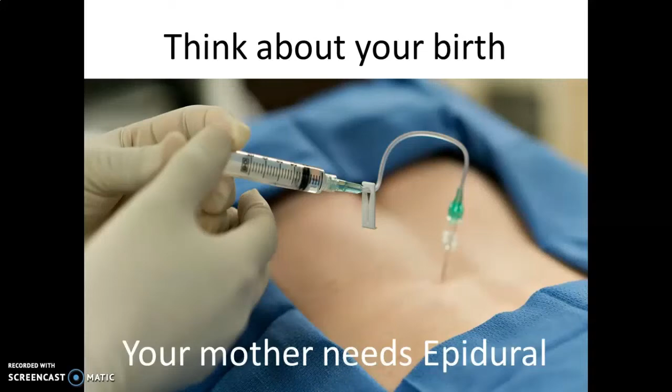Think about your birth — your mother needs epidural. Think about your death — your body needs formalin. From birth to death, you need many other things as well.

Early in the morning, you need toothpaste to brush your teeth. Then you need food and water to eat and drink. When you are ill, you need medicine.

Do you like to be naked? I am sure you are not. So you need clothes to cover your body. You need vehicles to go here and there, and those vehicles need fuel.

Can you live without electronic stuff such as smartphones, laptops, televisions, and printers? After a tiresome day, you need your home sweet home to sleep well.

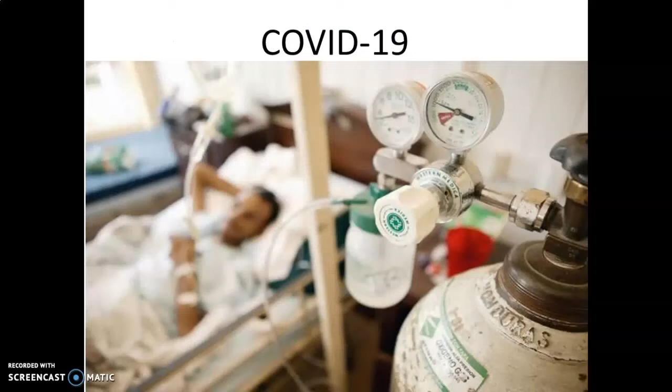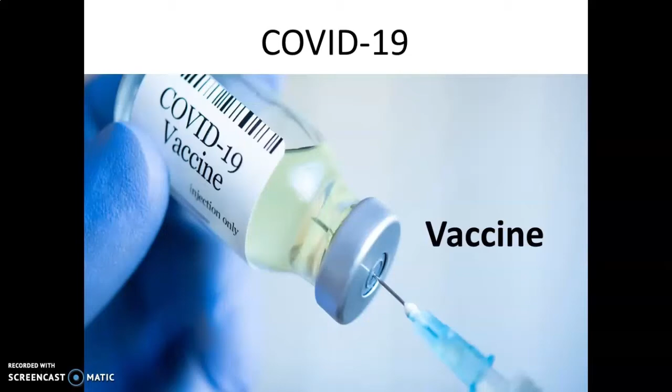Think about this COVID-19 pandemic situation. To defeat COVID-19, we all need vaccines. Did you think how all those things you need from birth to death are actually made? You may have taken them for granted, but all those were actually made with the help of chemical engineering.

So, what is this chemical and process engineering? Chemical and process engineering is the design and development of processes to produce, transform, transport and properly use materials and energy in environmentally, socially and economically effective ways by applying the knowledge of physical sciences, life sciences, mathematics and economics.

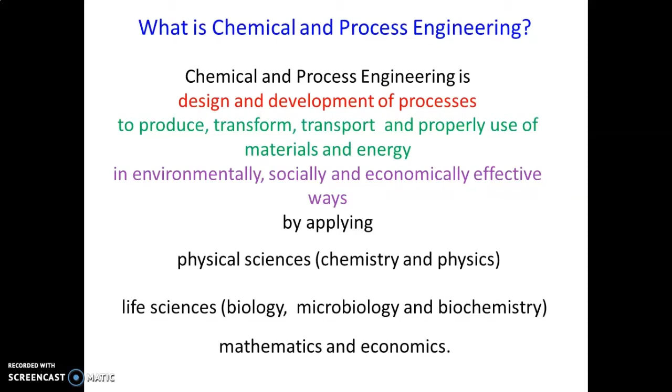Now let's see the difference between chemistry and chemical engineering. It's true that chemical engineers are comfortable with chemistry, but they do much more with this knowledge than just make chemicals. It's all about originality and scale.

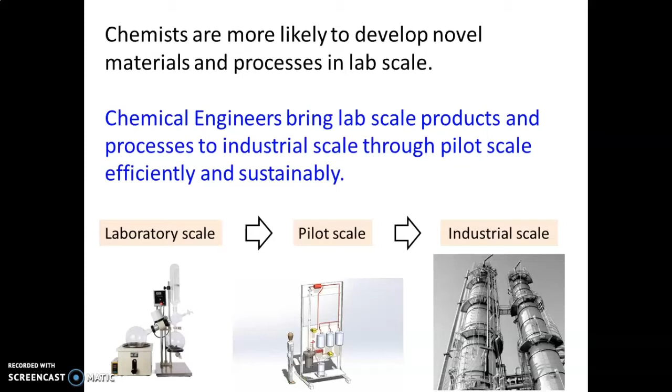Chemists are more likely to develop novel materials and processes in lab scale. Chemical engineers bring those lab-scale products and processes to industrial scale through pilot scale, efficiently and sustainably.

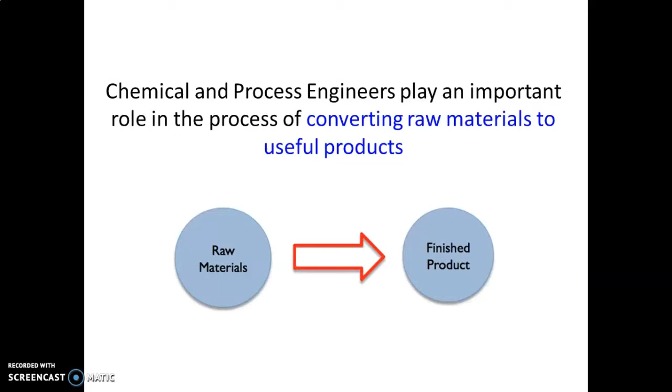Chemical and process engineers play an important role in the process of converting raw materials to useful products. When converting raw materials to useful products, different unit operations are used. Now, what are these unit operations?

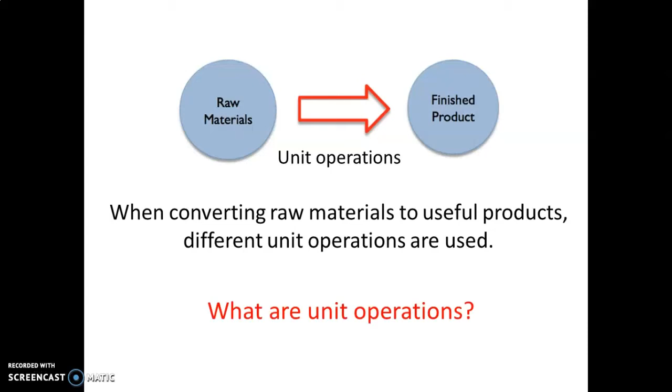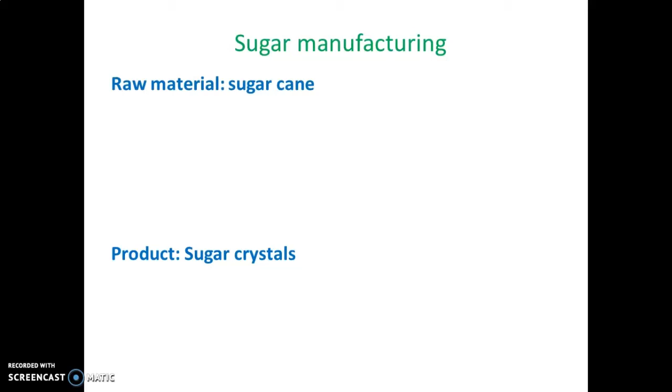Let's take the sugar manufacturing process as an example. Raw material is sugarcane, and we need to convert sugarcane to sugar crystals. First of all, we need to extract juice from sugarcane. Then the extracted juice is purified.

We call it clarification. Then we need to evaporate water from the clarified juice and concentrate the solution. Finally, we make sugar crystals from the concentrated solution — that is called crystallization.

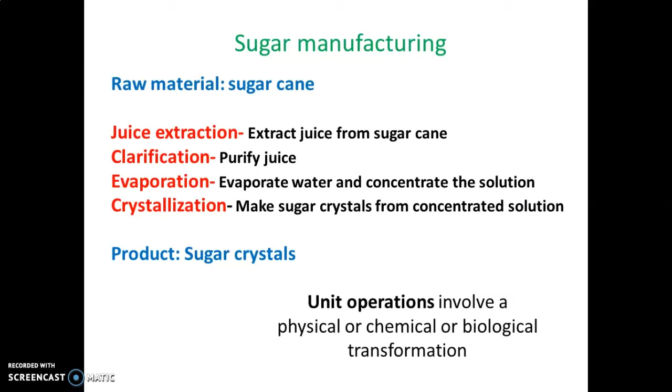These units — extraction, clarification, evaporation, and crystallization — are the major unit operations of the sugar manufacturing process. These unit operations involve a physical, chemical or biological transformation.

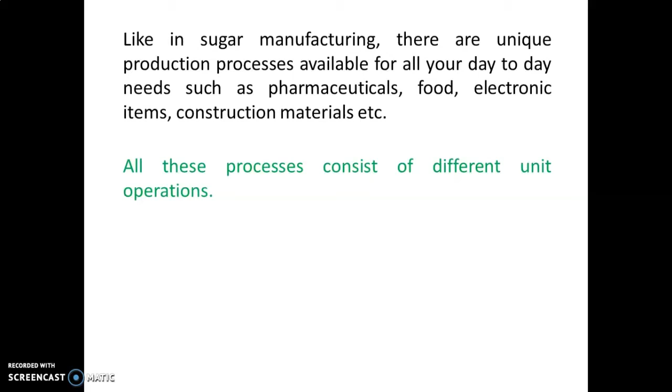Like in sugar manufacturing, there are unique production processes available for all your day-to-day needs such as pharmaceuticals, food, electronic items, construction materials, and so on. These processes consist of different unit operations. Planning and design, operation, control, and optimization of these unit operations are done by chemical engineers.

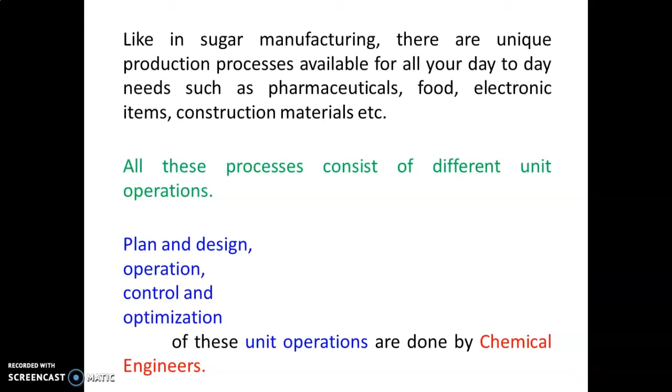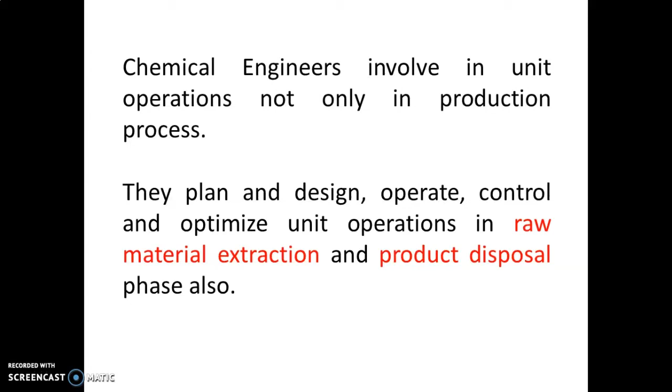Chemical engineers are involved in unit operations not only in the production process. They plan and design, operate, control and optimize unit operations in the raw material extraction and product disposal phases also.

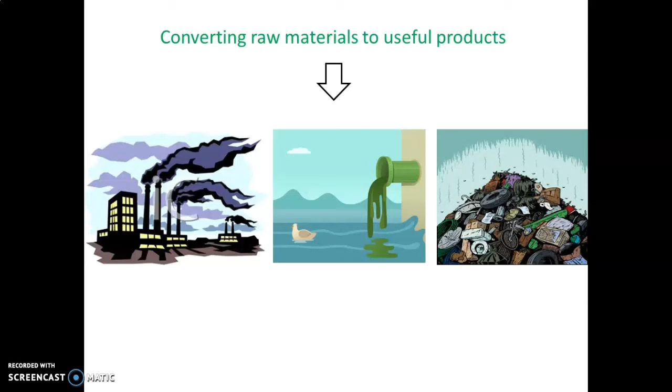We all know that converting raw materials to useful products generates many kinds of waste streams. Chemical engineers plan, design, operate, control and optimize the unit operations in order to minimize pollution as well. They always do this according to sustainable development concepts.

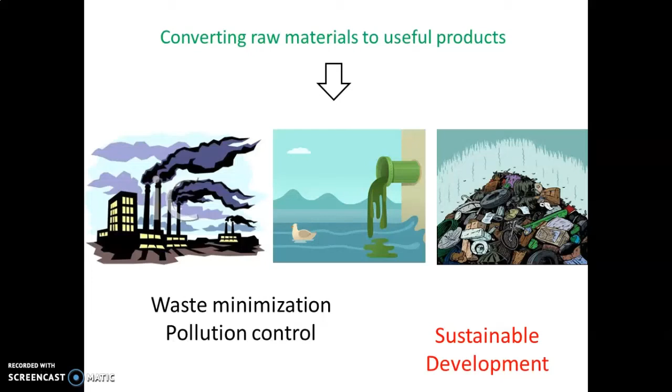Now, if I tell you in a concise way what chemical and process engineers do: they plan, design, operate, control and optimize unit operations and processes for the purpose of production, transformation and transportation of materials, and safe disposal or recycling of them after the use phase.

It is very clear that chemical engineers play an important role in the entire life cycle of a product or process.

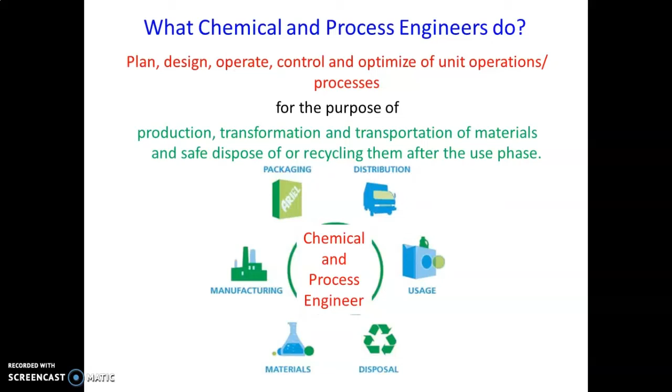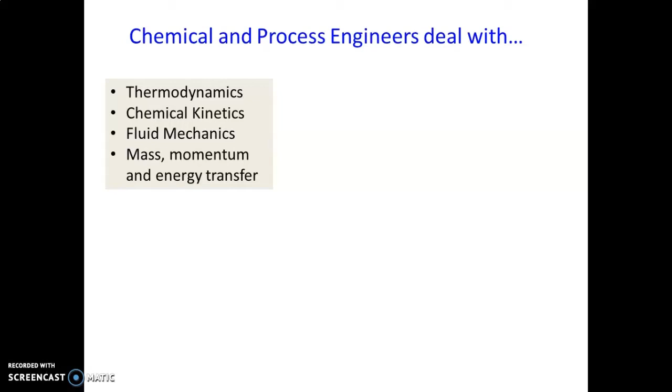Chemical and process engineers mainly deal with the fundamentals of thermodynamics, chemical kinetics, fluid mechanics, and mass, momentum and energy transfer. In addition, they also deal with several other fields such as materials, energy generation and utilization, separation and mixing processes.

They also deal with modeling, simulation and process controls, optimization and cleaner production, process research, design and development, occupational safety and health, pollution control and waste recovery, and also sustainability.

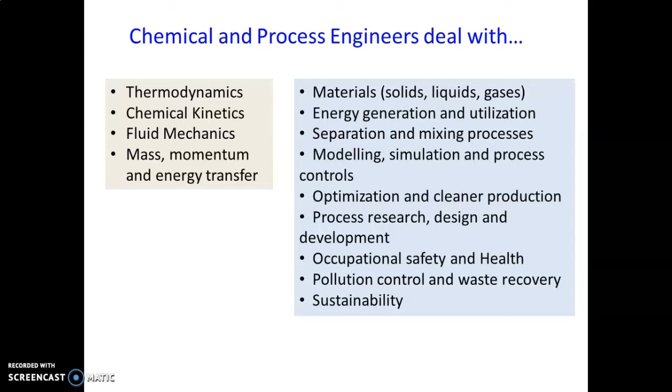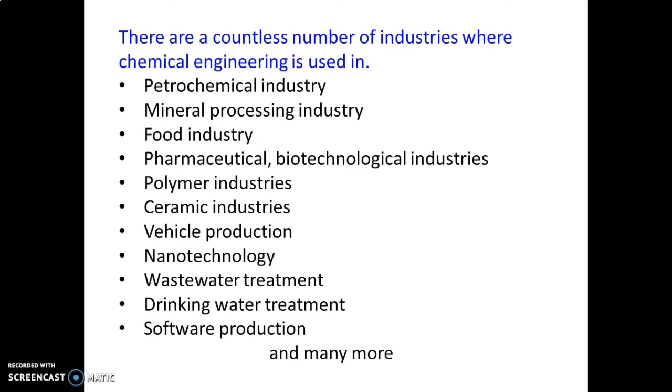There are two major destinations for chemical and process engineering graduates: industry, and academic and research. If we talk about industry, there are countless industries where chemical engineering is used. These are the industries in Sri Lanka where chemical and process engineers can work — chemicals, pharmaceuticals, food, beverages, water treatment, ceramics, and so on.